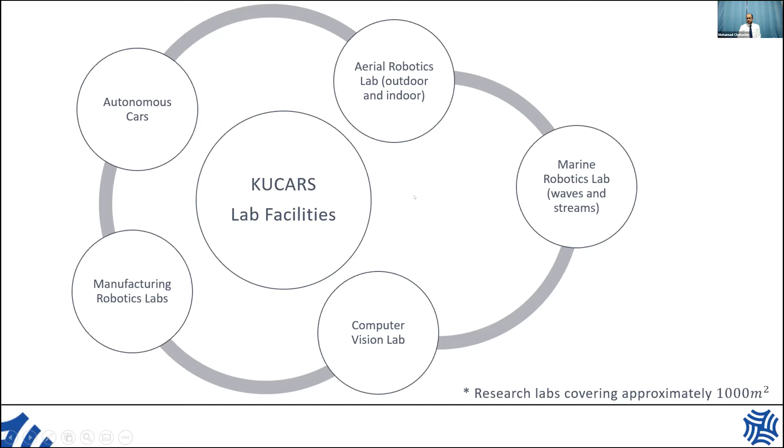We have multiple state-of-the-art research labs, and the KUCARS research focus is on 3 themes. The one that this presentation is concerned with is robotics for extreme environments. We have multiple state-of-the-art lab facilities here for robotics research that cover approximately 1,000 square meters across 2 campuses.

So let me start with the main part of this talk. Can we achieve identification of overall UAV dynamics in real time? Why have we asked this question? Because if we can answer it, we would shorten development time and also reduce development cost as a result. And this makes applications that require high performance of UAVs widely accessible.

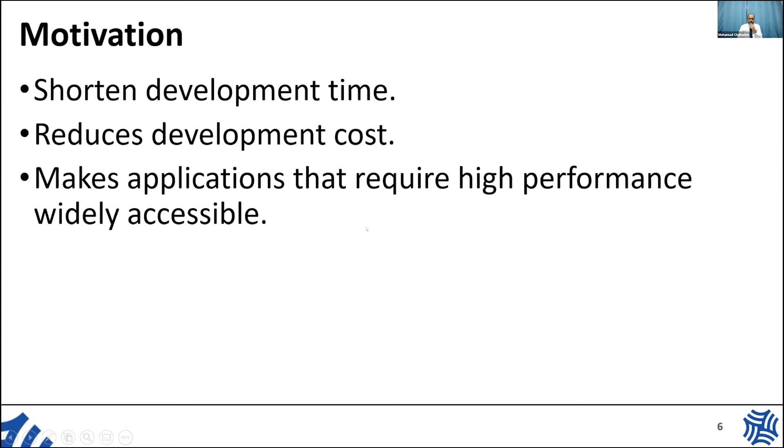We have formulated the problem of identification as follows. We have considered a planar multirotor UAV family, because we need to fix the model structure of our system, but still we assume that our system has unknown drag, delays, actuator dynamics, physical characteristics, and configuration, for example, whether it's a quad, hexa, or octocopter.

However, we assume that we have known bounds, and these bounds can still be very wide. For example, in our recent publications we are considering UAVs that range in motor-to-motor span from a few centimeters to a few meters.

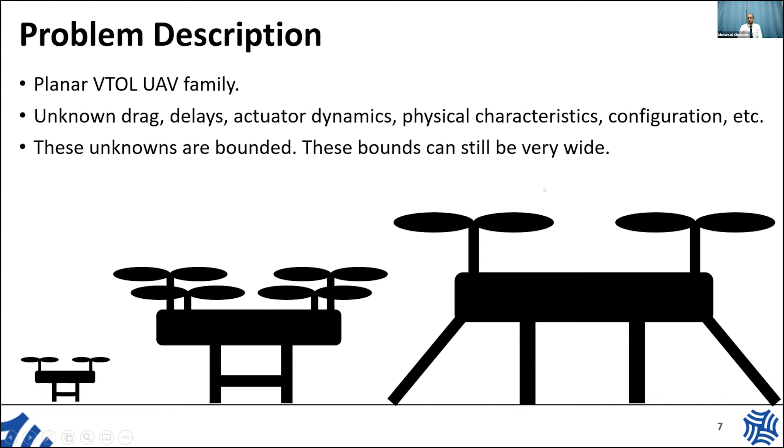Let me go a bit technical here and give a gentle introduction into this field of online tuning. Sorry, this assumes some knowledge of control systems theory at the undergraduate level. Historically, we have what's called the relay feedback test. The relay feedback test was introduced in 1984.

With the relay feedback test, we can find the ultimate frequency and the ultimate amplitude of our system using a single test. So we inject a relay in our unknown system. For example, we have here 4 unknown processes, and this is the Nyquist plot of these 4 processes. We get the steady state frequency and amplitude due to the relay excitation, and from that, we can know this point on the Nyquist curve.

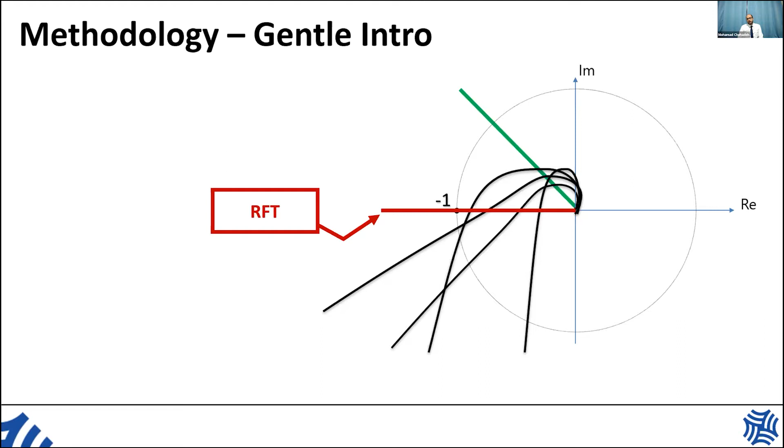Later on, this idea was developed: what if we can identify different points on the Nyquist curve? Here the modified relay feedback test was introduced. Basically we have an additional degree of freedom compared to the relay feedback test, and we call this degree of freedom the phase of the test. We can select it based on our family of unknown processes.

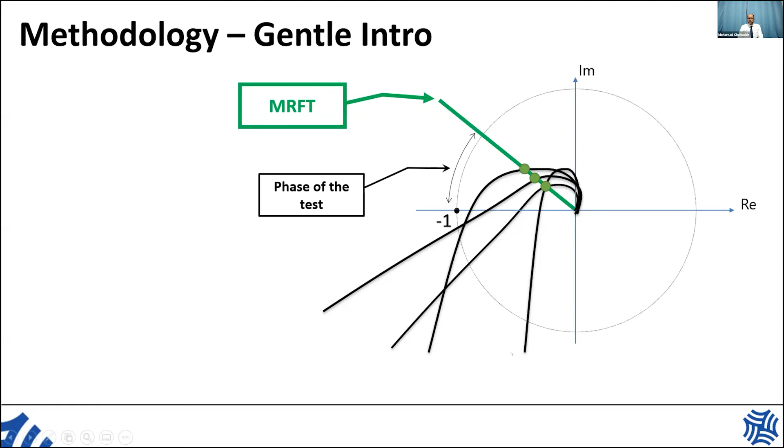This additional degree of freedom has introduced a challenge: how can we select the phase of the test? We have used optimization under process uncertainty. We have considered all the processes in the admissible ranges of UAVs, and we have done Monte Carlo simulations to find what we call the distinguishing phase. And this is the result of this.

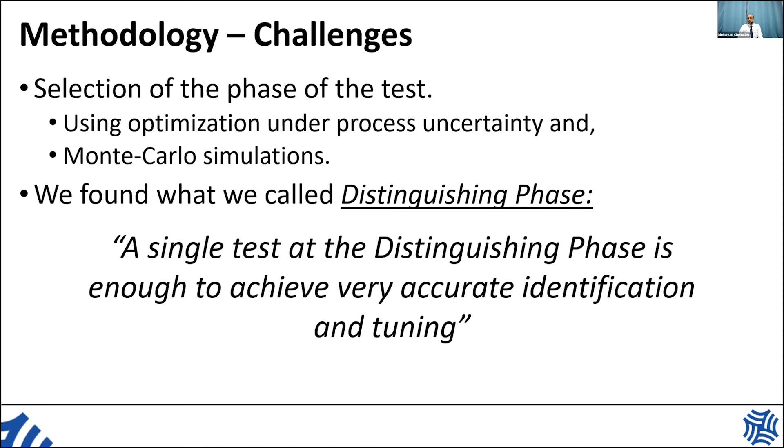Using a single test at the distinguishing phase is enough to achieve very accurate identification and tuning of controllers. So very fast adaptation can be done, almost optimal, if we have a single test at the distinguishing phase.

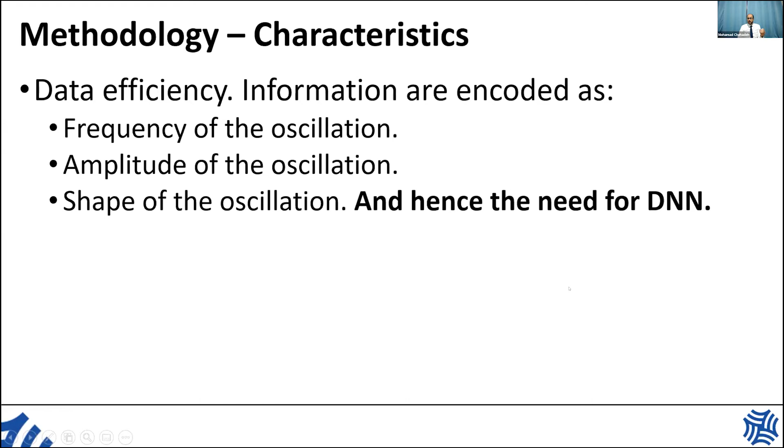From another perspective on the same problem, identification usually requires a lot of data. But here we have a very interesting characteristic of the system: data efficiency. At just a single frequency of the system, parameterized by a phase, if we know the frequency of the oscillation, the amplitude of the oscillation, and also the shape of the oscillation, because these relay tests are nonlinear, we can map them back to the process that produced them. Therefore, we need deep neural networks to provide this inverse map.

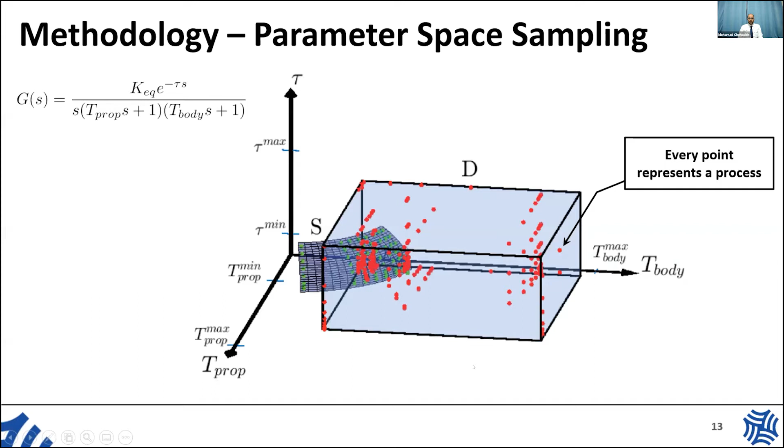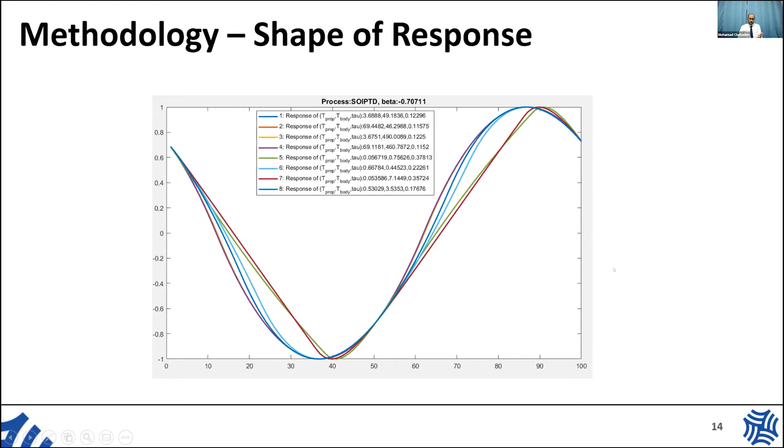So we have hundreds of UAV designs in our domain, and we have produced the MRFT response of the system in simulation. For example, here I show that different UAV designs have different oscillation shapes.

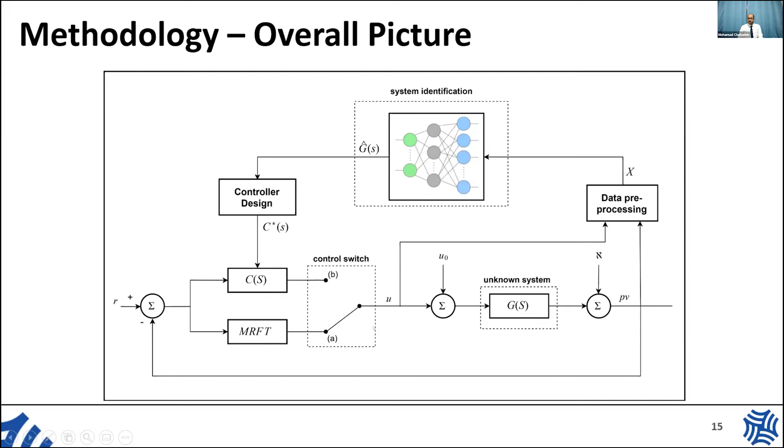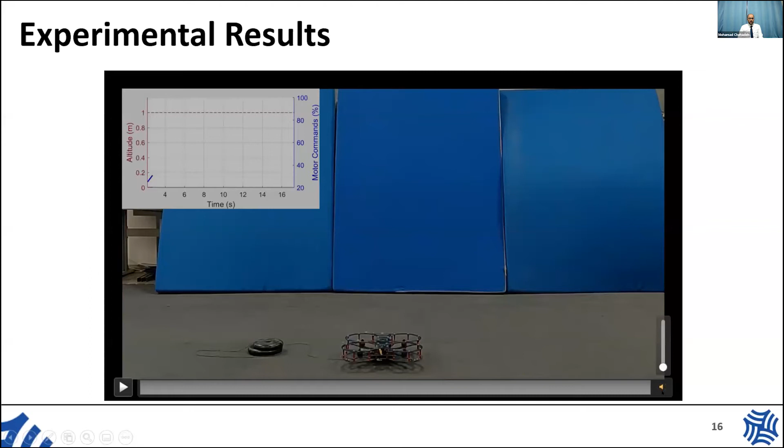Let me show you some experimental results. This was one of our early works. In this work, we are concerned with the tuning of altitude loops and attitude loops because they share the same model structure.

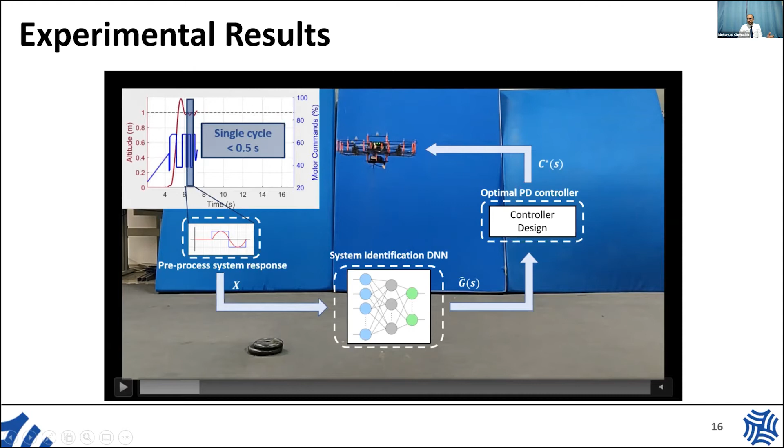So the system here, let me go back to, so we have excited the oscillations here. As you can see, the system was in operation, under operation of the relay. So we take a single steady state excitation, we pass it through the DNN, and we could know what is this UAV, what's its size, its characteristics. And accordingly, we have found the optimal PD controller. Just a single cycle that has a period of less than half a second.

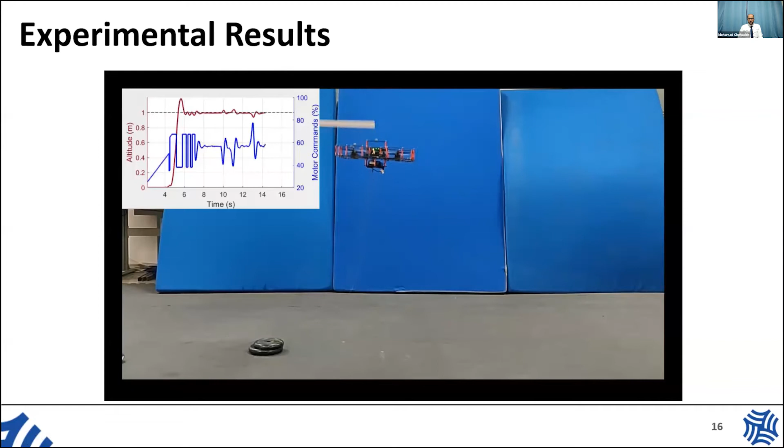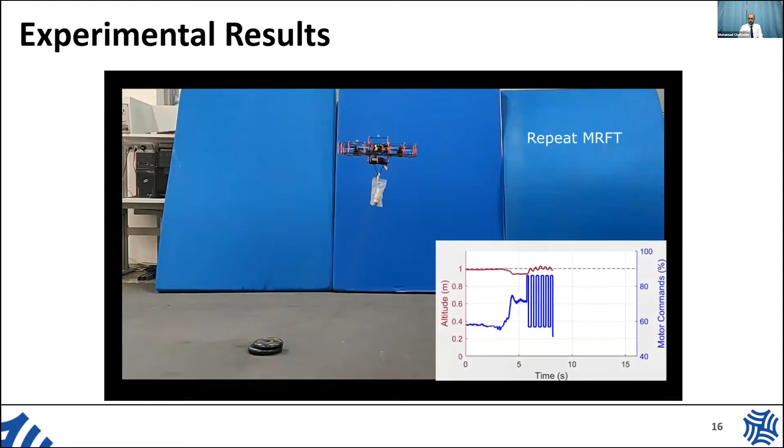So you can see that the system is robust to external nudges, even if the characteristics of the system change. We can repeat the test, do the tuning, and all of this can be run in real time. And we have optimal performance again.

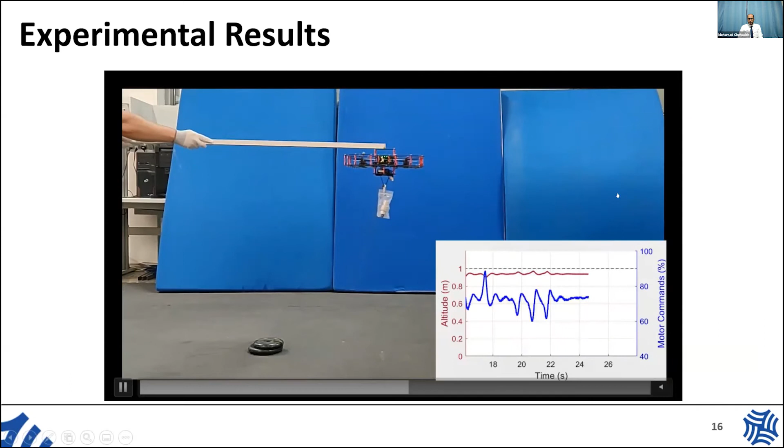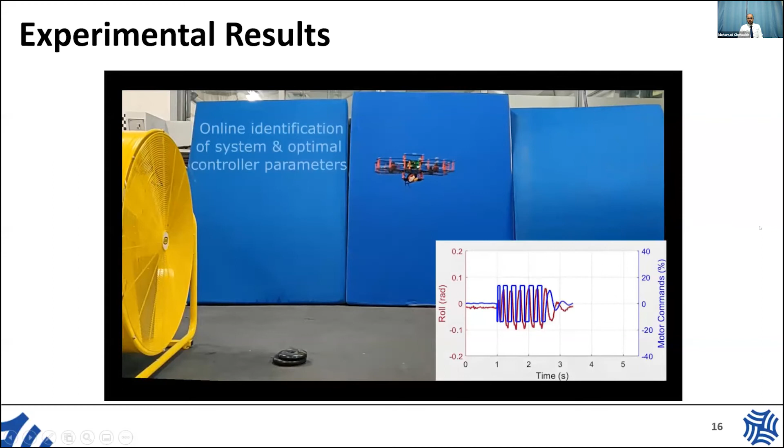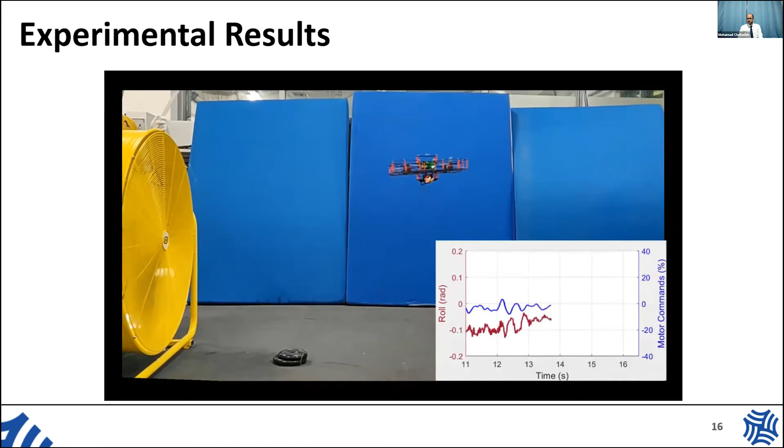So the same adaptation now is applied to the attitude control loops. Adaptation done. And now we try to apply external disturbance, in this case, induced wind speed of 5 meters per second. And again, some external nudges.

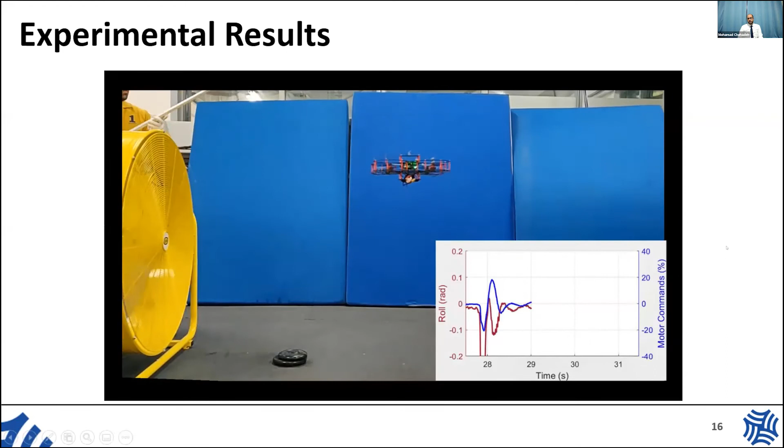So in this early work that I'm displaying here, we are not yet concerned with outer loop tuning. Because outer loop tuning or positional loop tuning, like for example, moving in translational axis, requires a different treatment. And why is that? Because we have a different parameter space that's quite big. So we have here in total 5 unknowns: 2 time delays and 3 time constants.

So we have developed an approach where we do identification and tuning in cascade. So for example, we do attitude identification. We find that this is the right process, this is the describing process of our dynamics. Then from that, we do another identification at a specified distinguishing phase for the translational dynamics. And we identify which process is the correct one, the most describing one.

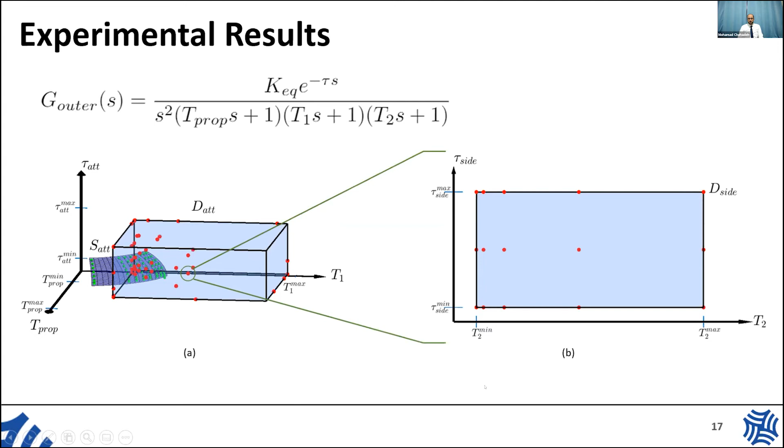The results of this can be quite remarkable. In this video, I show a UAV. So this UAV, prior to takeoff, doesn't know its own dynamics. It doesn't know, is it a 1 meter span UAV or a few centimeters? How big are the motors? What are the delays in the sensor system? So from takeoff, it starts shaking. It starts identifying its own parameters.

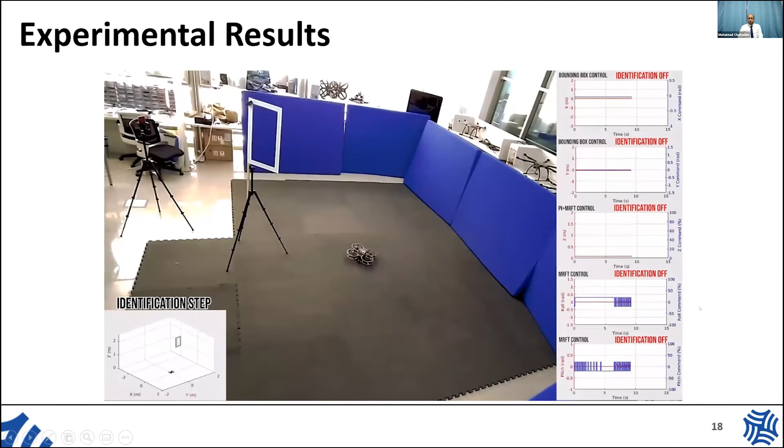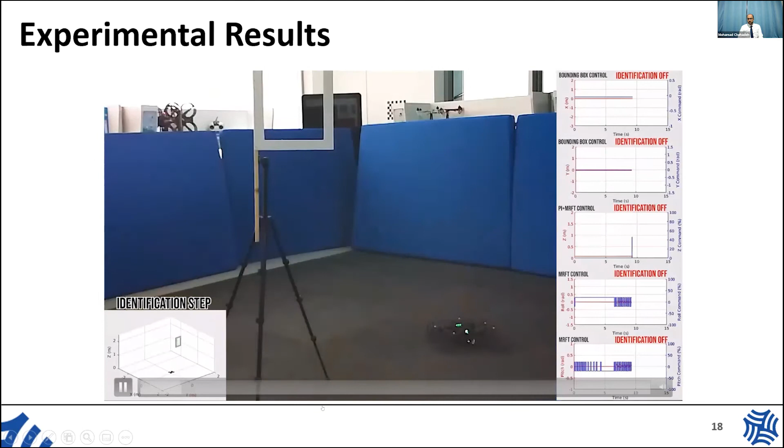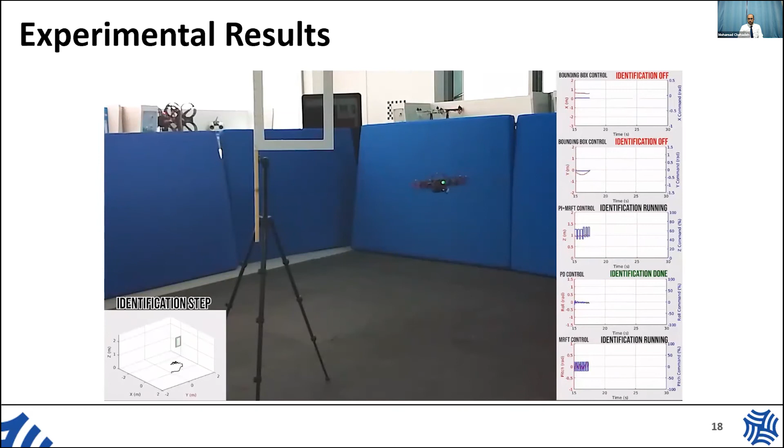So you see, it checks all the control channels through the self-excited MRFT oscillations. Yeah, so once tuning is done for every channel, now it's tuning the translational loops because it's done with tuning of the inner attitude loop.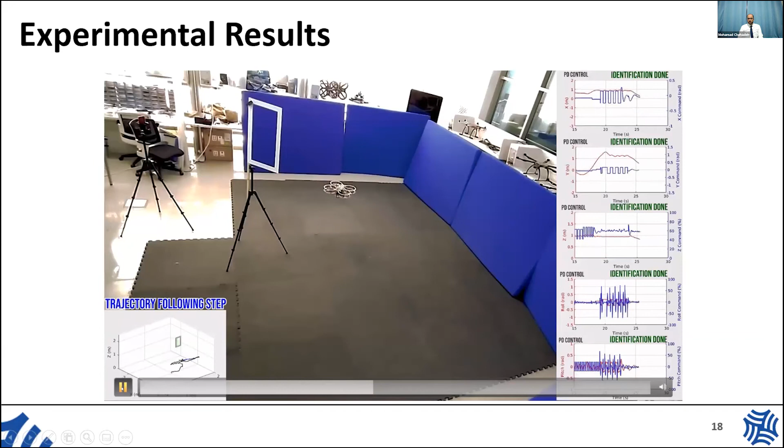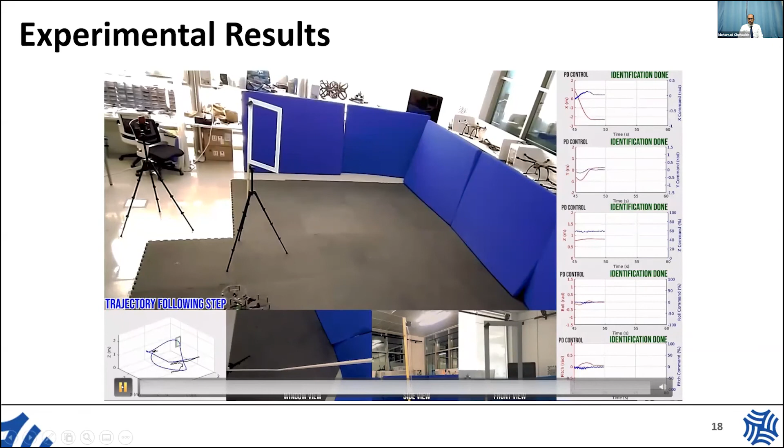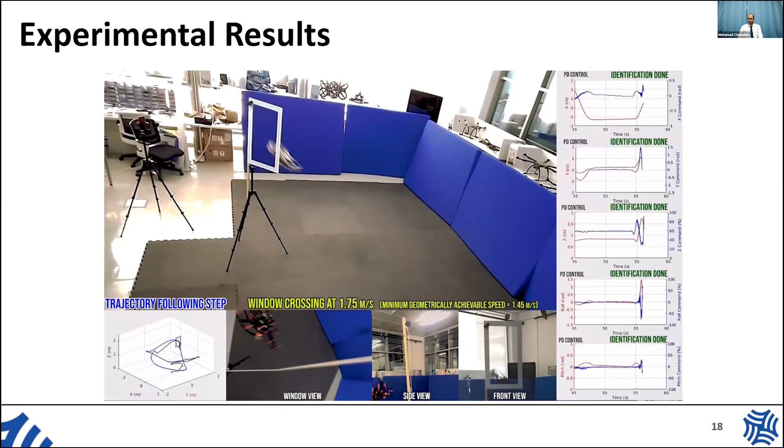And now we show the control performance. The high performance of these controllers has been achieved using fast online adaptation that lasts for less than 15 seconds overall. Doing a window passage here again, but at a speed that's really close to the minimum geometrically achievable speed. We have tested this algorithm on multiple sizes, on multiple configurations.

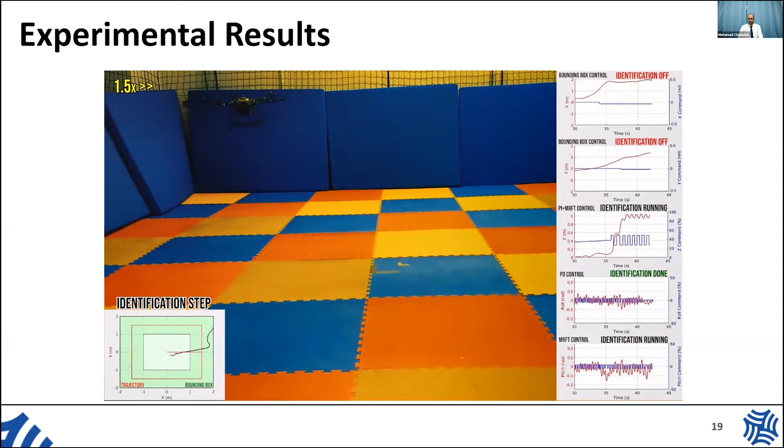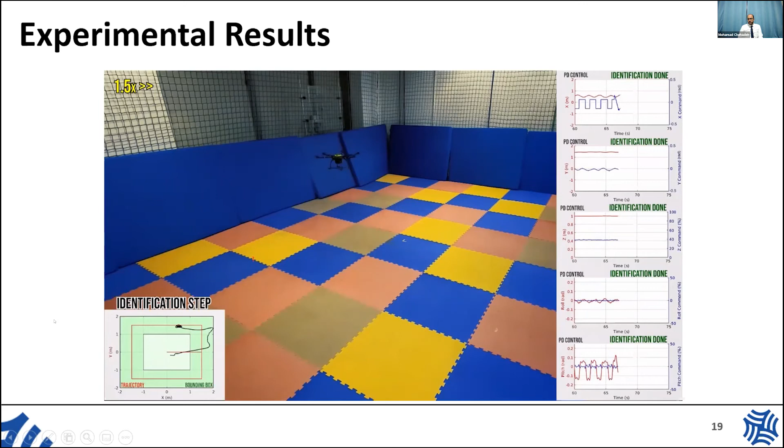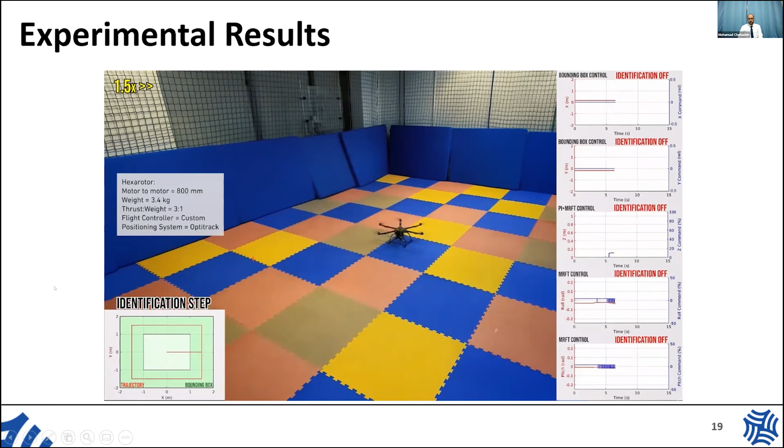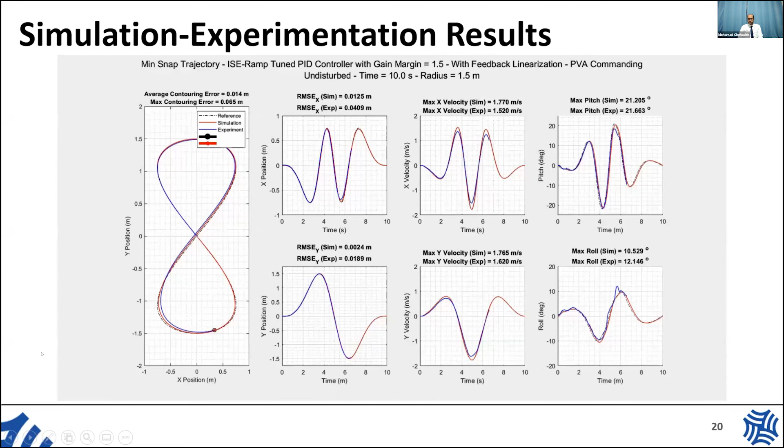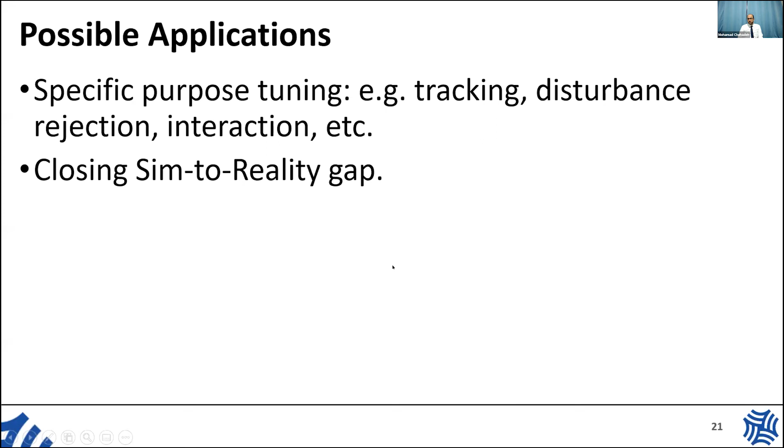So this opens the door for a few possible applications. For example, because we have accurate knowledge of the model of the system, we can perform specific purpose tuning, like tuning for tracking, disturbance rejection, interaction, and so on. And because of the high match between simulation and experimentation, this serves as a stepping stone towards closing the simulation to reality gap.

Currently, we are working on the following. We are trying to extend the application of this algorithm, deep neural network modified relay feedback test, DNN MRFT, to visual servoing and SLAM problems. We are also exploring the use of identification results in estimation tasks. We are also addressing the nonlinearities through gain scheduling, where we can do the test at different operating modes of the UAV. And because the system description that we are getting is linear, this opens the door also for lightweight planning algorithms.